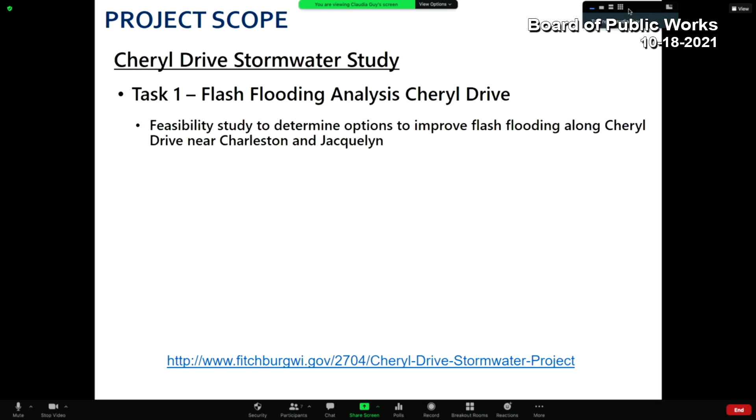This project is being done as part of the Cheryl Drive stormwater study. Task 1 was a separate task to look at flash flooding analysis in the Cheryl Drive area. What we're talking about today is task 2, a potential citywide backyard drainage program. As part of this task, we looked at other local governments and what they do to provide aid for private drainage issues. Eventually we will put together a recommendation to council for a potential new backyard drainage program. If approved, this would be a citywide program.

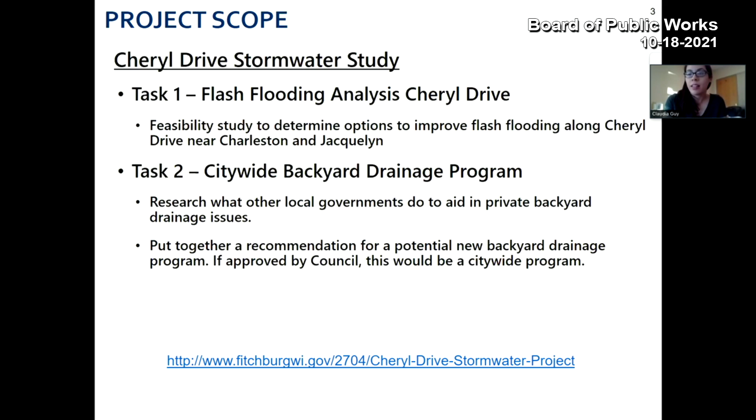If you have any interest in taking a look at recordings or deliverables associated with this Cheryl Drive stormwater study, you can find all of that at the link at the bottom of the screen. And we're talking about task 2.

So the agenda today: we're going to start with some background information, and then I'll hand it off to Nick to talk about his research on local and nearby programs, as well as regional programs he looked at a bit farther out, to get examples of what these backyard programs might look like. Then we'll talk about next steps, and a big part of that section will be seeing if there's any feedback we can get from the Board of Public Works on this type of program.

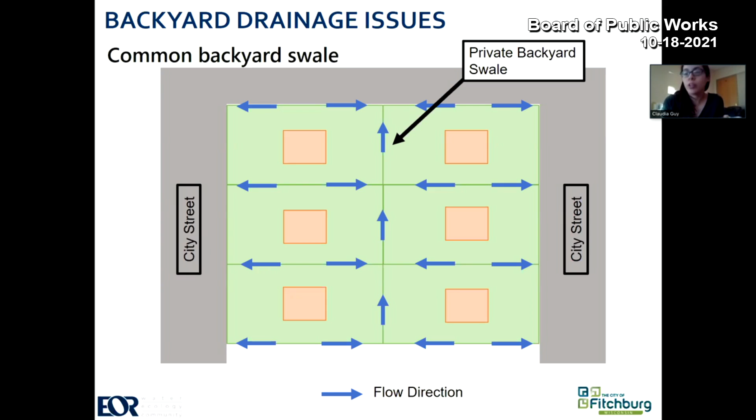So, background information and common types of private drainage concerns. We'll start with the concept of a common backyard swale. You see this in a lot of neighborhoods where the front yard drains to the street, and the backyards drain to a swale that carries the water downhill until it gets to the street. You can see that multiple homes are going to a common backyard swale.

What you might find is that when the neighborhood was originally built, this swale might be a consistent pitch and drain properly. However, over time that might change. Landowners might have projects that change the swale design, or there might be settling that occurs. In one way or another, the swale might just not work as effectively as it did in the past. In this example, you can see a portion of the swale that's steeper than originally designed, and also a portion that's shallower than originally designed.

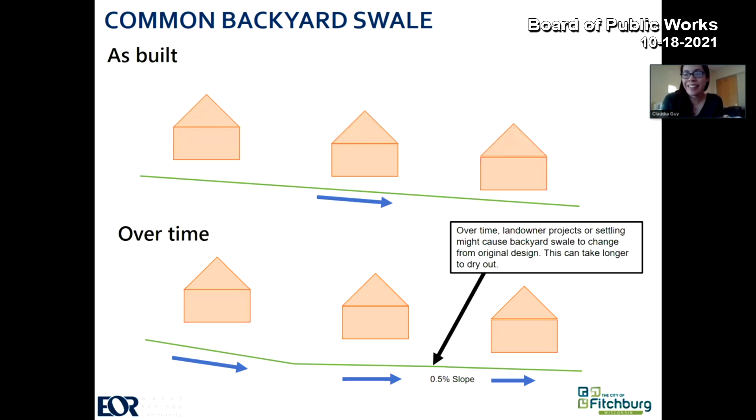Typically when you get under 1% slope, that's where you start having problems. So you might have bird bath areas, or if it's back-pitched, you might have areas where the water stands until it infiltrates or evaporates, for example.

Another common issue we see is just low-lying areas or flat areas that don't drain well. What property owners are able to do in this situation, sometimes you can regrade those areas, bring in fill so they do drain properly, or you might have to look into a private drain tile system, or even an inlet in this type of scenario.

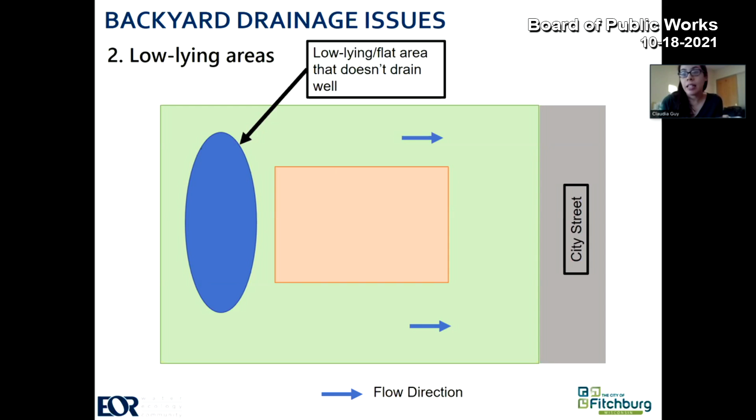And then there are sump pump concerns. Very basically, a sump pump is a submersible pump installed in a sump pit dug at the lowest point in the home. They typically discharge to grade, just outside your home on the ground, and they often only turn on when needed, such as after a heavy rain. However, if groundwater is high, you can run into a lot more problems with sump pumps, especially if they're running continuously for many months or even years at a time.

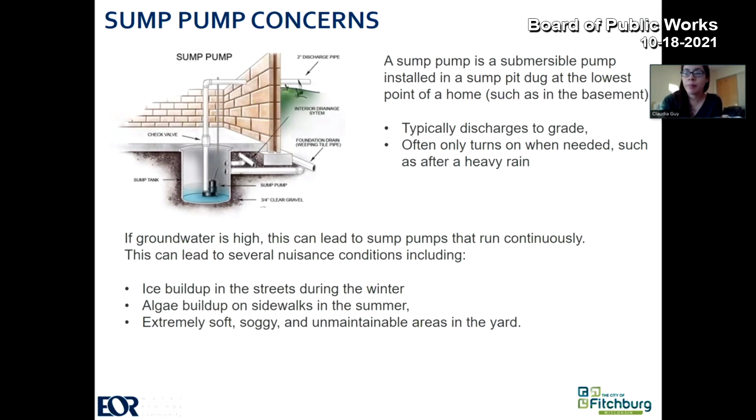This can lead to several nuisance conditions, including ice buildup in the streets during the winter, algae buildup on sidewalks in the summer, and extremely soft, soggy, unmaintainable areas in your yard if you're discharging it to your backyard, for example.

So the stormwater utility's role currently—just a little background information here. We do have a stormwater utility. It was established in 2002. It provides funding to meet our current management responsibilities. The stormwater rates are set based on a rate study and reflect the city's current level of service for residents.

The current level of service is primarily for city-owned stormwater facilities. That includes inlets, manholes, storm sewers—all located within the city right-of-way, on city parcels, or in public stormwater easements. In addition, the stormwater utility maintains regional ponds, infiltration basins, bioretention basins, and greenways, all located on city property.

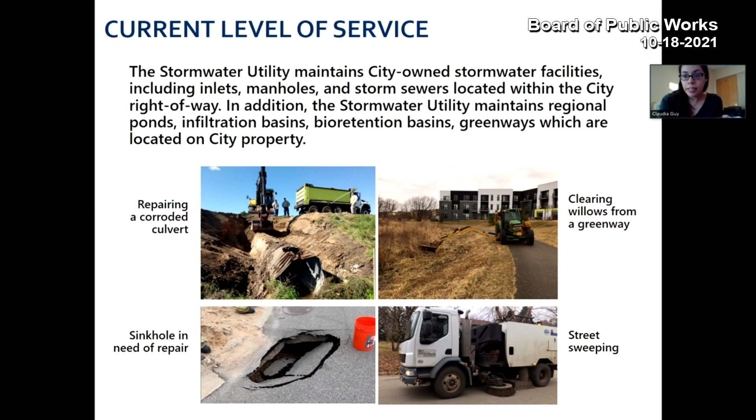The current policy regarding issues on private property is that addressing stormwater issues on private property is the responsibility of the landowner. This includes, but is not limited to, grading to alleviate drainage issues, installation, maintenance, and repair of any private storm sewers including drain tiles, discharge of private sump pumps, as well as driveway culverts.

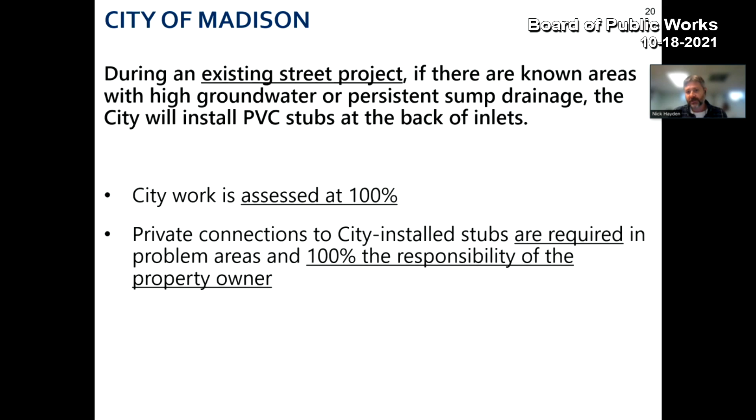Next, the city of Verona. They told us that Verona really doesn't get involved with fixing private property drainage issues, aside from perhaps visiting the site just to discuss things, but they don't recommend or get involved in the actual fix of any private rear yard drainage issues. But for cases where sump pump discharge is impacting the public right-of-way, the city may install public storm sewer for private property owners to connect to, and when they do that, the following conditions generally apply.

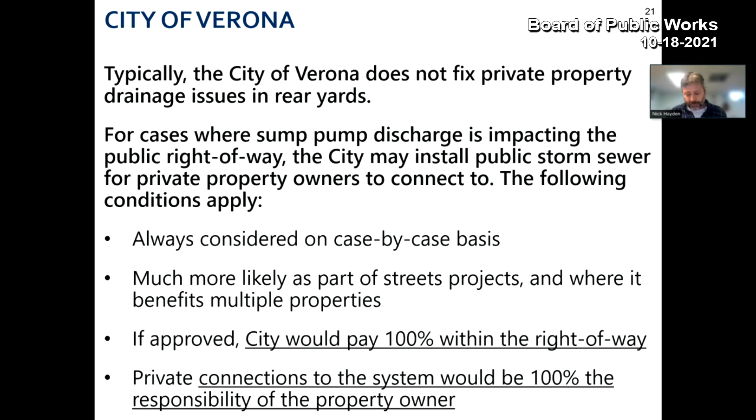They're always considered on a case-by-case basis, so there's no guarantee of a certain action by the city. It's much more likely to happen when it's part of a street project, like street reconstruction or resurfacing, as well as where it benefits multiple properties and not just a single landowner. When these projects happen in the city of Verona, the city has often paid 100% of the costs of that storm sewer extension or inlets within the right of way. But again, the private connections to the system would be 100% responsibility of the property owner.

The city of Middleton typically does not get involved in private drainage issues. They will allow and facilitate connection to public storm sewer when requested by property owners. Any city work in the right-of-way is usually assessed back to property owners at 100%, and connection costs are 100% the responsibility of the property owner. Therefore, there's typically no cost share or assistance on the city's part.

And then this is the final local municipality, city of Sun Prairie. Their policy is that if there's a scheduled street project, the city may install rear yard surface drains to address common swale problems, so they specifically will work in backyard areas sometimes in terms of providing a storm sewer inlet. They will also potentially install sump pump feeder lines to address sump discharge problems. The likelihood of them doing this sort of city work project is greater for problems that affect multiple properties, that are a public safety issue, or are causing freeze-thaw road damage. So they've had situations where they get ice buildup from sump discharge or other discharge, and it's actually affecting the longevity and the condition of their roads. And so they view it as sort of a preemptive thing they can do.

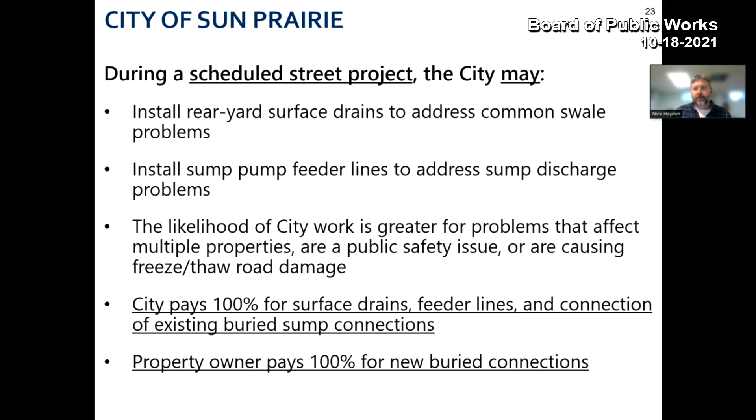So next, I'll move on to the broader policy review. We looked for examples of formal policies at the cities of Oshkosh, Sheboygan, Iowa City, Sioux Falls, and Wood Dale, Illinois. Again, these were ones that were either known to city staff through previous project work or experiences, or they had documentation on these programs that was able to be found online. This doesn't mean to represent some sort of a typical approach or assistance - these were just examples of places that had formal documentation and policies related to backyard drainage and other private drainage issues.

The city of Oshkosh has what they call a mini storm sewer or storm lateral program. They have an annual budget for the city to install storm laterals and drains, and these drains go about 1 foot onto private property to be accessed by the property owner. The city pays 100% for the lateral and drain from their stormwater utility fund. The property owner pays 100% for any actual drainage connection, including maintenance.

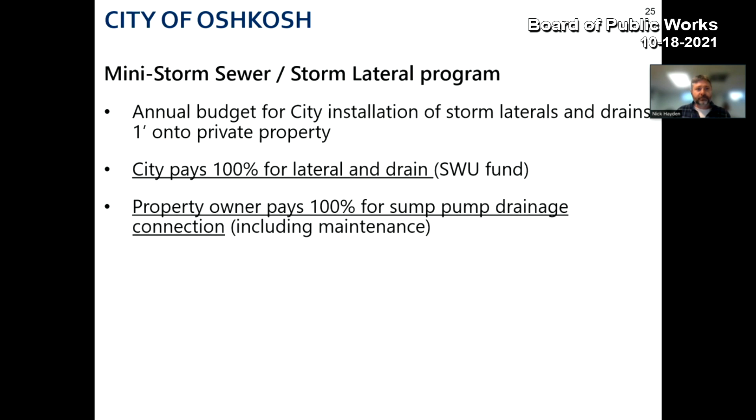The city of Sheboygan has a mini storm sewer program. They also have an annual budget for installation of rear yard city storm sewer, which they require must serve multiple properties. The city pays 100% for rear yard drains, but they must be given a no-cost easement. The property owner then pays 100% for connection to the drains, including maintenance, and there's a requirement that if these are installed, the property owner must connect within 90 days. Additionally, the property owner pays all fence repair and landscape restoration.

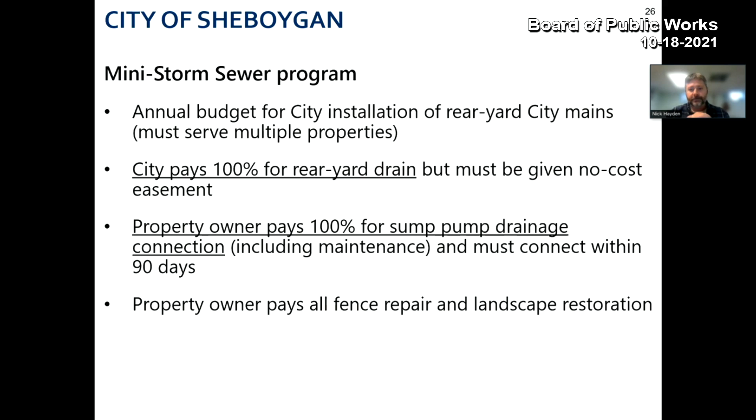Next, Iowa City - they have what they call their drain tile program. This is similar to some of the others, where if a public hazard area has been identified, the city may install a drain tile collection system in the right of way. The city would pay 100% for that collection system if there was a verified public hazard. The property owners would pay 100% for connecting to that collection system.

Sioux Falls, South Dakota, has experienced a number of problems due to high groundwater and other water pooling in low areas. Their sump pump collection systems are installed in all new developments, and the city may install a retrofit if there's a clear public need. In those cases, the city pays 100% for the collection system and the property owner pays 100% for connection. There's a requirement for connecting when these are built, but it's not typically strictly enforced.

And lastly, the city of Wood Dale, Illinois, has a more general cost share program for resolving private drainage issues. This program can address solutions for both common swale or sump pump issues. The city pays 50% up to $3,000 for approved private projects. The property owner would then assume ownership and maintenance for any connections to the public storm sewer that would be made.

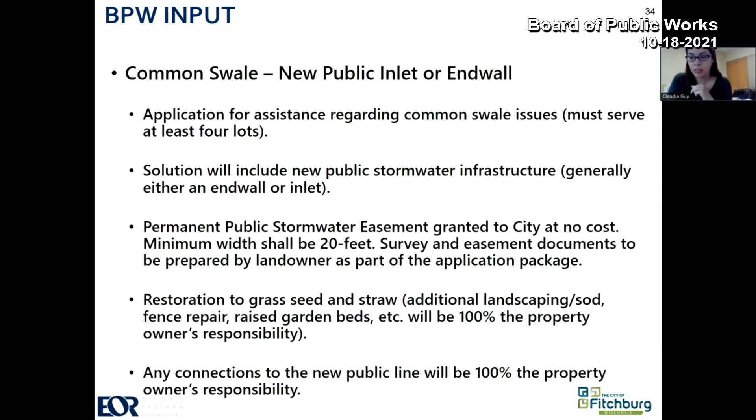Claudia, how would somebody at the city know if this program was successful or not? Well, I think the success would be if we make this program available and people apply for it, and we install storm sewers that are solving people's problems. I think that would be one measure of success. Do we have documented right now what the actual problems are and the rate of the problems that we're experiencing?

A lot of times private property issues don't even get brought to the city because a lot of people will just install drain tile or grading or whatever without even reaching out to the city. So especially since our policy is that we don't have any sort of assistance for these types of issues, we don't have a really good database of where all of these exist.

And then what's the benefit to the city? Are we looking to reduce our overall costs, or are we looking to have less water go into our system? The benefit would be providing a service to the residents. I don't think this would necessarily be a benefit to the right of way. It would just be a service provided. Okay, and then my final question is, do we have actual staff to develop and support and maintain this program?

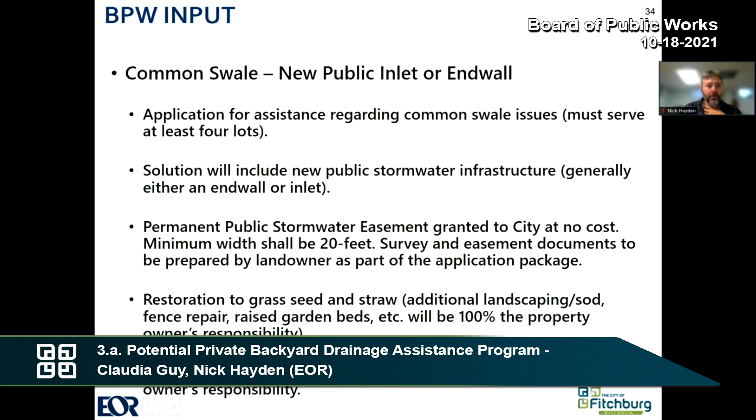I guess so. First of all, I noticed one thing you don't have in here at all, which many of the other programs did: that it had to be related to an existing street project. Now, I realize these are in backyards, so you're draining out to the street, so it might not be important in this one. But it seems like this problem could be handled from new construction by not allowing people to change the drainage pattern so that these problems exist.

Now, I understand under existing or older neighborhoods, you said yes, sometimes things change, but things don't normally change on their own. Usually it's a property owner that has made some kind of modification—they put a berm in their backyard because they were trying to get privacy, or they were adding landscaping where there wasn't anything before, and they built up areas and those kinds of things. So it seems like it's a self-created problem to me in a lot of cases.

So I'm not sure—like Michael said, what's the benefit to the city? And like you said, it's providing a service to the residents who are having the problem, but it's more of a cost and a detriment and a staff issue to the city, to me.

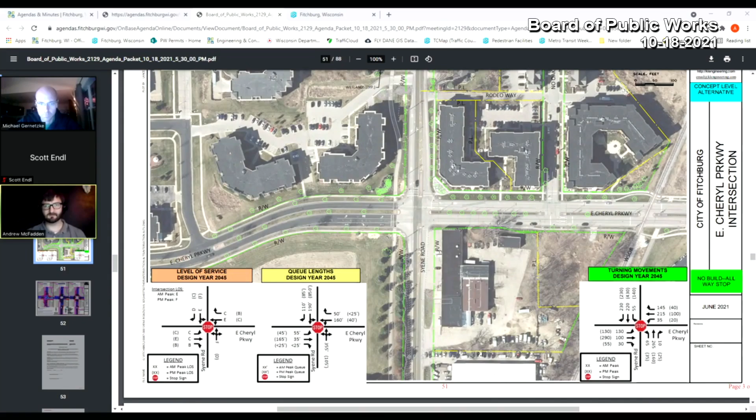Can you see the intersection there? Okay, yes we can. So what you're seeing here, on the bottom, is basically the future year level of service, assuming an all-way stop control. Unfortunately, we're at level of service E and F, so that's 35 plus seconds per vehicle on average. So really it's just untenable, especially that southbound through/left. That means an all-way stop isn't an option here. So we're left with either a single lane roundabout or a traffic signal. For some reason it says it's paused, so I'll try that again.

Okay. So these are the three options.

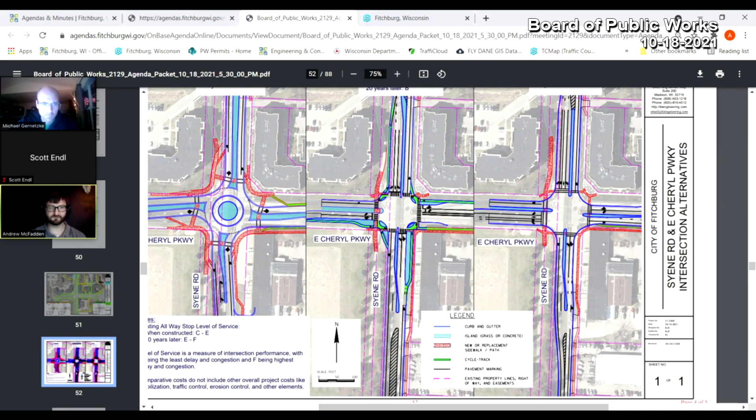You're all very familiar with the single lane roundabout. I just want to note that there is existing cycle track to the east of this intersection, so we'd be connecting to that, but otherwise it's pretty much the same as typical. We have the shared use path on the west side that the roundabout will be connecting into, and then we connect back into on-street facilities on either side of the intersection.

I'll just briefly run over the traditional intersection. This is a traditional signal: one lane for lefts, one lane for throughs, and in some cases, when we have enough right turns, a lane for right turns. Again, we would either be carrying the bicycle lanes through or terminating them if we have a right turn bay, or if we don't have a right turn bay.

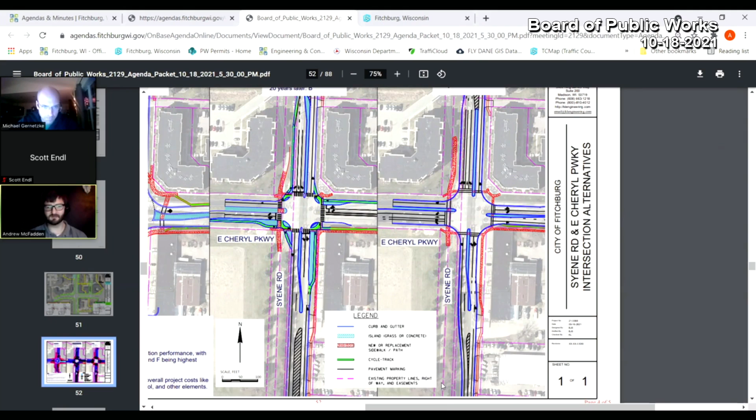And then the protected intersection, I'll dwell on this a little bit more, only because it's a little bit new. Really, it's a traditional signal plus these teardrop islands, and the teardrop islands are there just to reduce the turning radius to slow down right turning vehicles.

So if you're a right turning vehicle taking a right, depending on how we time this, you can turn permissively. Let's say in a late green, you would start turning here. The nice thing is a vehicle is able to turn right, square up to either the bike lane or the crosswalk, and get out of the through lane. So the through vehicles can keep going, and this person doesn't have back pressure and can make a nice slow right turn, which increases visibility.

So that's really the win for the protected intersection treatments.

I'll also mention, for those who aren't familiar with the bike treatment: you'll come from an on-street facility, come up onto a cycle track, and on green you'll pass here and go forward. If you want to take a left turn, you'll stop here and then take a left turn and continue on. If you don't want to take a left turn, you can just continue on to your lane. So it basically just improves visibility of bikes and pedestrians, and other than that, it functions very similarly to a traditional signal.

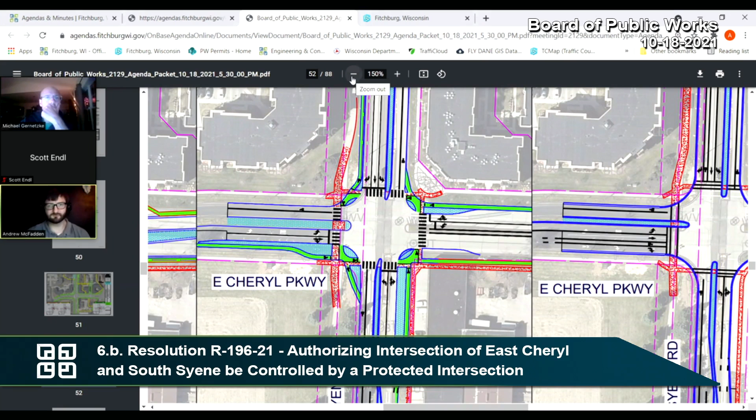So with that, there are some pros and cons, mainly that with the roundabout, we've talked a lot about the pros and cons between roundabouts and signals. Roundabouts do have that reduction in right angle crashes, and they have lower off-peak delay, so you don't have to stop. Whereas with signals, in both cases, you'd be talking about potentially more predictable, more comfortable bicycle and pedestrian crossings, and that's even more so with the protected intersection.

Unfortunately, the traditional signal is the lowest cost at basically 1 million. The roundabout comes in next at basically 1.1 million. And then the protected intersection has a range.

We likely think it's the highest cost alternative because of some of the custom work you have to do with the concrete islands, some of the additional push buttons you have to have, and truncated domes for those ramps. But we do have a big range in there just because it's new. As far as I know, it hasn't been tried in Wisconsin, and so it comes with a little bit higher price tag.

Now, that's a big range. It's probably going to be on the lower end of that, but we really just don't know, so we want to offer the full breadth there. And then there could be some potential increase in maintenance cost, just depending on how we clear snow out of those kind of shared bike and pedestrian facilities.

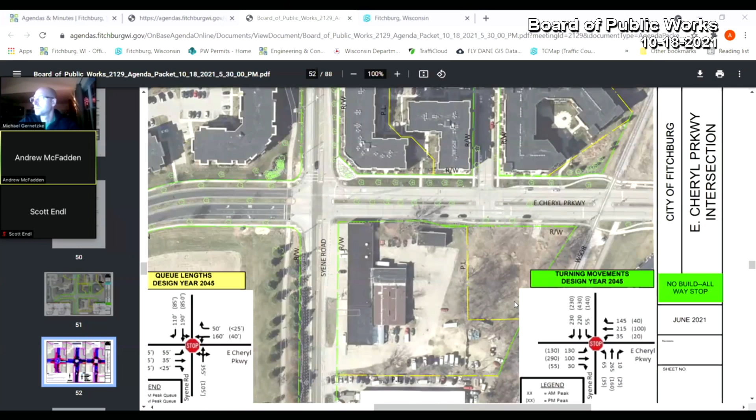Maybe I'm a little slow here. No, I totally get it. Because the bikers are out there, and if they're like me, they've got a myriad of risks every day that they take, and they can mitigate them. The pedestrians don't quite have the same mitigation options.

So basically what we'd be doing here would be reducing the crossing distance. The medians slightly help that, but we're still going to time the signal so that you'll be able to cross from curb head to curb head. Pedestrians will be in this red portion of concrete, so they'll be further out into the intersection than they typically would be. With that, they'll have a shorter crossing distance, and they'll also benefit from these teardrop islands having the right turning vehicles tee up to them and be slower.

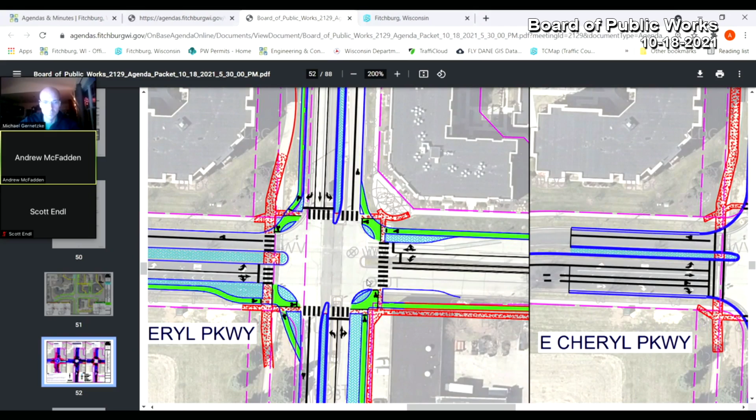Okay, thank you, that explains it. That's clear.

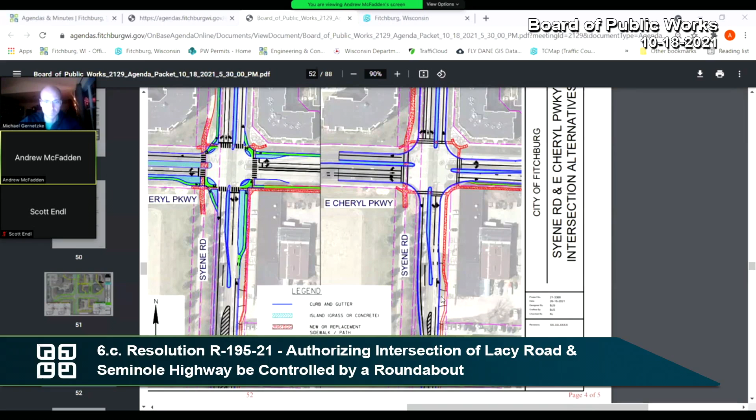So yeah, you guys have all seen this before. Mainly, meant to share my PowerPoint. The resolution 119, passed earlier this year, included the design of the intersection with a staff recommended option. It passed council with the direction to hold an additional public meeting. We did that, as Dave mentioned, and we've received feedback that was very consistent with the previous feedback we received.

That's all I have. What's the approximate cost? If I recall right, the roundabout was less costly than a full signalized intersection. That's correct. In this particular case, we're looking at something like $2.5 million for the roundabout. Right now we're looking at a 153 foot inscribed circle, very similar to the Nesbitt and Fitchburg roundabout size, and that includes both construction and right-of-way costs. We'll be needing to take right-of-way on 3 of the corners.

Jim, Michael, any questions on this? No? Okay, call the vote. All in favor of Resolution R195-21, signify by saying aye. Aye. Opposed? Motion carries.